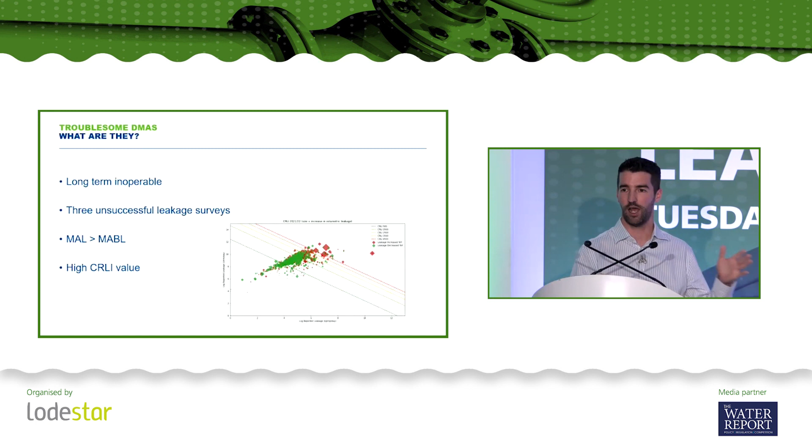So if the calculations aren't working, you don't know what the leakage is in there. In a lot of areas, we find that can sometimes give you a high level of leakage. When it's operable, it gives you a high volume of leakage, but then the next week it's inoperable again, and that high level of leakage is carried forward. So that can give us an issue when you find quite a few of these inoperable high leakage areas in the reported figures. So trying to get those operable, understand what's happening is really important.

Previously, it was almost like we would do the stop tap bashing. We talked about the listening sticks this morning. That would be our standard approach. So we'll be going around. If we couldn't get that leakage down after 3 surveys, you'd have thought you'd learned by then that it's not working, you need to do something different.

So we have some lead leakage technicians that are the best of the best within our company. They're given a little bit more time. They're not targeted in the same way. So they're really trying to do a deep dive within the DMA to understand what's happening, why can't we find it? And they're very good at finding it when it's leakage. But we still have the issue, if it's not leakage, you're never going to find it.

So we're moving on to the approach where MAL, the minimum achieved level, never gets down to where it should be. So you can do estimates on the number of properties, the length of mains, that kind of thing, looking at where we think this should be. And no matter how hard we try, we're never getting below a certain point. And it's trying to understand, well, why is that? Is it really difficult to find leakage, or is it not leakage? So we're prioritizing them to look at them in a different way.

The final one I've got on there is some work we've been doing with Invenio earlier this year, and they made us aware of this CRLI value, we call it. Don't ask me what it stands for, but it's a bit like a leakage indicator, which is a product of leakage per property and leakage per length of main. So it's looking at, for that size of DMA, what is your expected level of leakage?

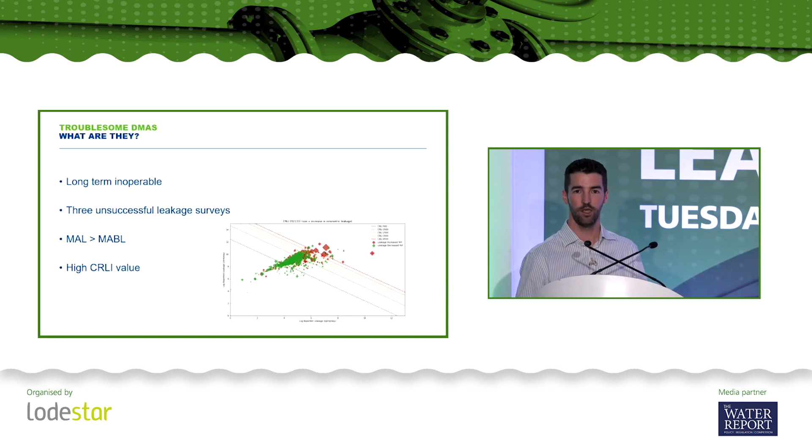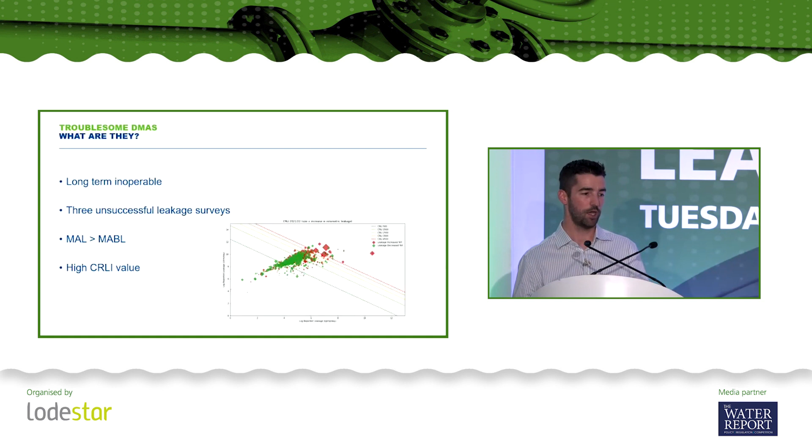And you have these values where the average range or a good range would be about 1,000. And then you're looking at your outliers and you're trying to take them from the outside of the graph and bring them down. So again, it's just a different way of looking at the data for the size of that DMA. Something doesn't look right here, and you're trying to prove what that is and reduce the leakage.

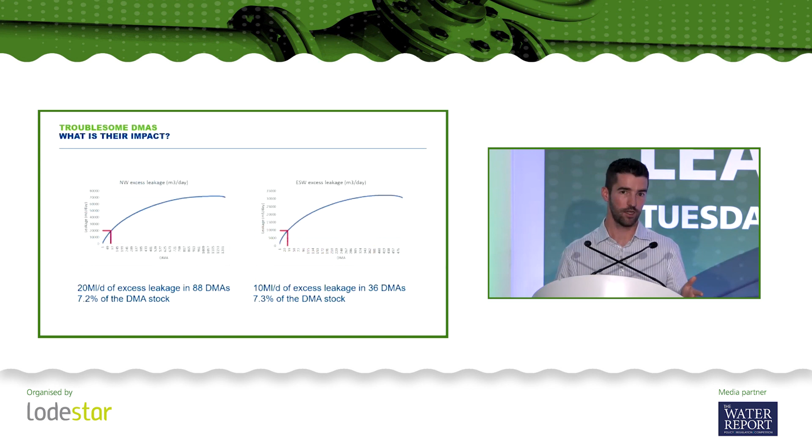So we did some analysis to try and understand how much of an impact these DMAs are having on our reported figures. So if we look at the targets that we were hoping to achieve in this AMP, around 20 meg reduction in the north, just using approximate figures, that leakage is within 88 DMAs, so 7.2% of the DMA stock. So if we can improve that 7.2%, then that would achieve our leakage target

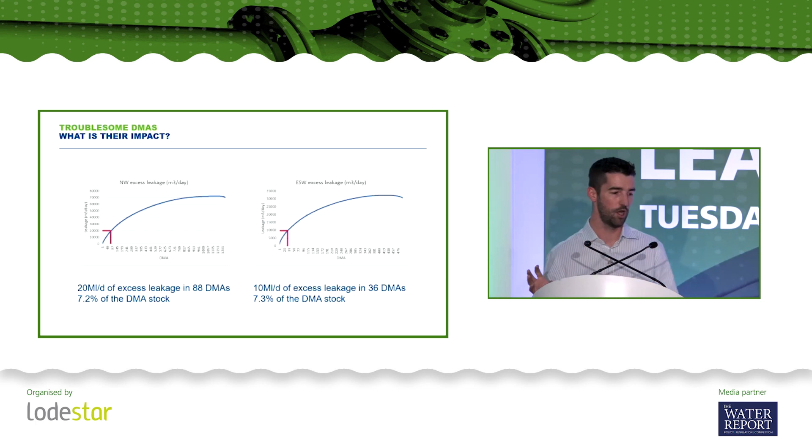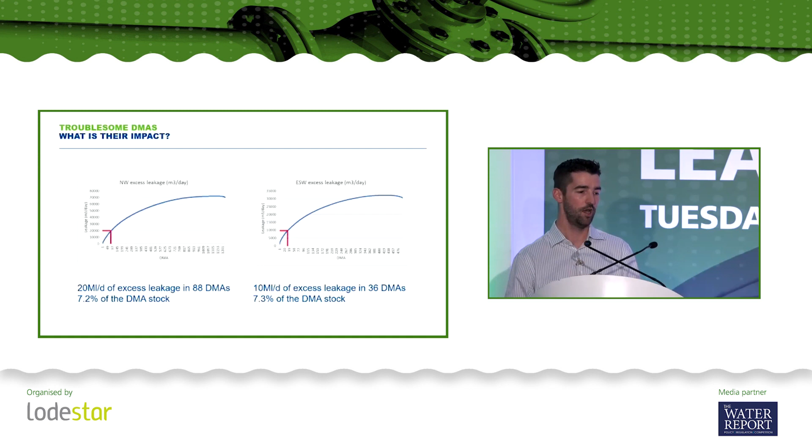in this AMP. And very similar for Essex, so like I say, completely different region, different background. But if you look at the 10 meg reduction that we were looking to make this AMP, it's in 36 DMAs, almost exactly the same percentage, so 7.3%. So it's really about if we can focus into these DMAs and get these sorted, it's going to have obviously a significant impact on our performance.

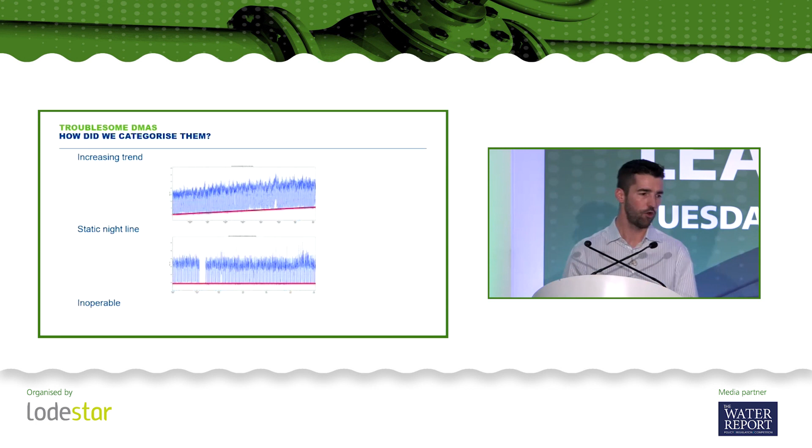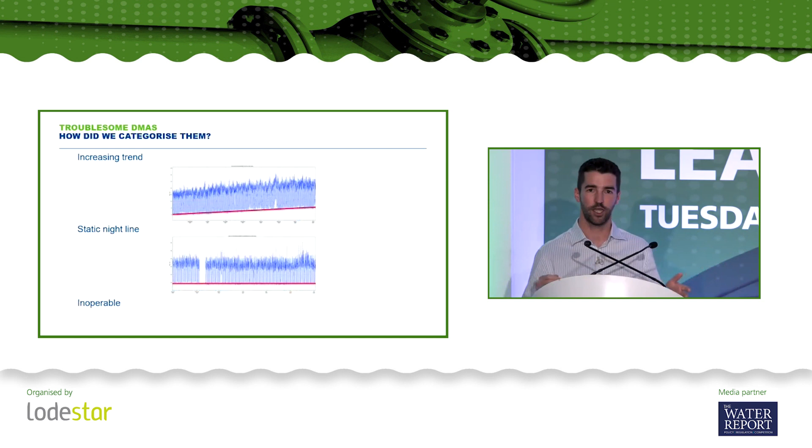The final thing we did was categorizing them, so you get different flow categories. So the one where we've got an increasing trend looks more like leakage. Something's changed, it's deteriorating, so you suspect that is leakage breaking out. And then on the other side, you've got these static night lines. So no matter how many times you get in there, you just can't get below that point, and it just has that flat night line.

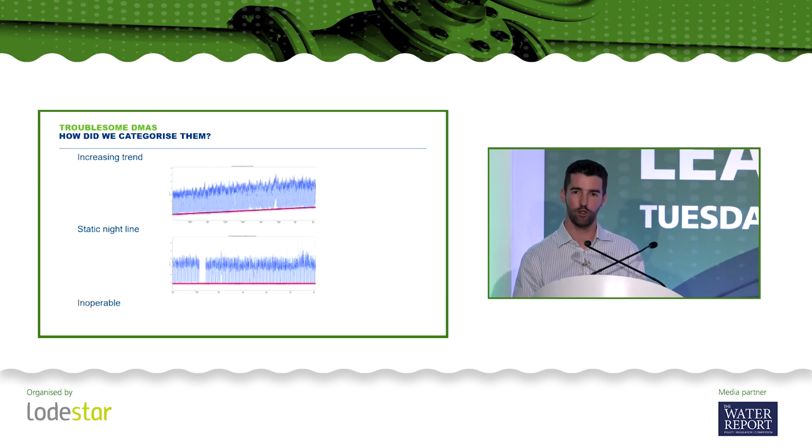So we try to treat those slightly differently, and we've applied different approaches, and I'll go through some of those in a minute. I've got the inoperable in there at the bottom, which needs to be sorted, needs to be operable again, but they never really get involved in these projects because you can't really send a contractor in to sort leakage out when we don't really know what's going on. So it's just a flag that those inoperable ones are really important to get sorted out, but they're taken out of the scope of the project.

So I'm just going to run through a couple of the projects that we've done. So the first one's FIDO Direct. Very quickly what it is: it's a lift and shift survey with the FIDO bugs. So FIDO come in, they will do a sweep of the DMA, they'll do all the follow-ups on the POIs, and they will do a blue line mark on the ground and then pass all the information on to Northumbrian Water to then do the repairs. So we did about 15 DMAs between April and July this year.

And these are the initial results. So in the 10 DMAs that we did in the north, from about 120 POIs, we ended up with 71 leaks. And in terms of nightline reduction, we achieved a 1.5 meg reduction in leakage over that period, which was really good. In Essex, we did around 5 DMAs, a huge amount of POIs there, 228, but only resulting in 39 leaks. But again, the actual leakage reduction was very promising. So 2.5 megs in that 3-month period was really good and comparable with what we were doing with our own technicians.

So this is all additional resource on what we're doing. So I suppose we're trying to use our existing ALC technicians to maintain that natural rate of rise, and this stuff is then making the step change to get us down on the target. I would highlight that we don't have any noise logging capability within Northumbrian Water, so we don't have a noise logging team ourselves. We don't have any permanent fixed acoustic network or anything like that. So for us, this fills a bit of a gap.

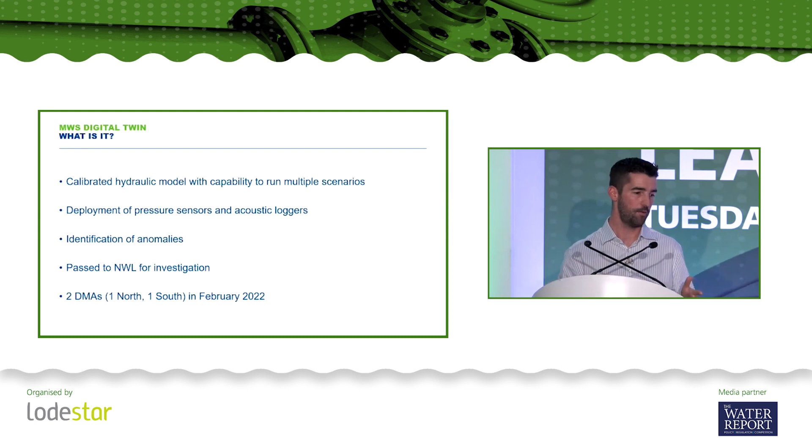Moving on to the Morrison Water Digital Twin. This was more focused on those static night lines. I should have said the FIDO was where we knew there was an increase in trend, so we suspected leakage. These ones now we're looking at where we had a flat night line. I might not be doing a great service here, but my simplistic view of it was...

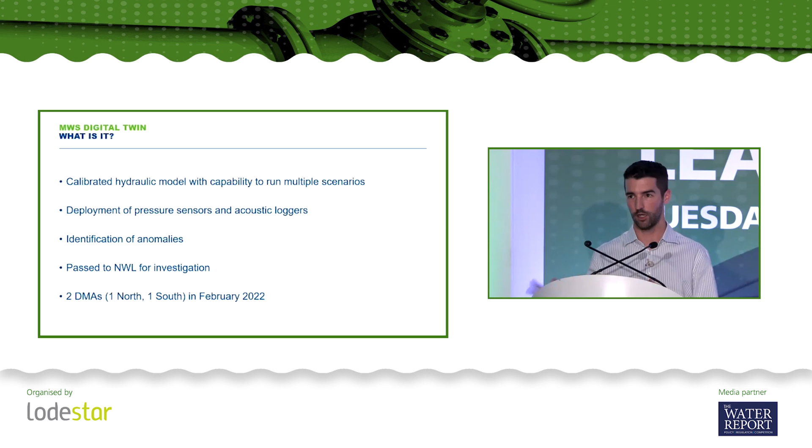It's a calibrated hydraulic model with the capability to run multiple scenarios. We provide all the data in terms of GIS data, demand data, and then they deployed some pressure sensors and acoustic loggers within that network as well. They're looking for anomalies. So the model says there should be this amount of flow in that part of the area, and you identify where it's different. If there's an issue, you go in and look at what's causing that difference - is it because there's more leakage than we've got in the model? Is it because there's more demand? Is there something going on in the network?

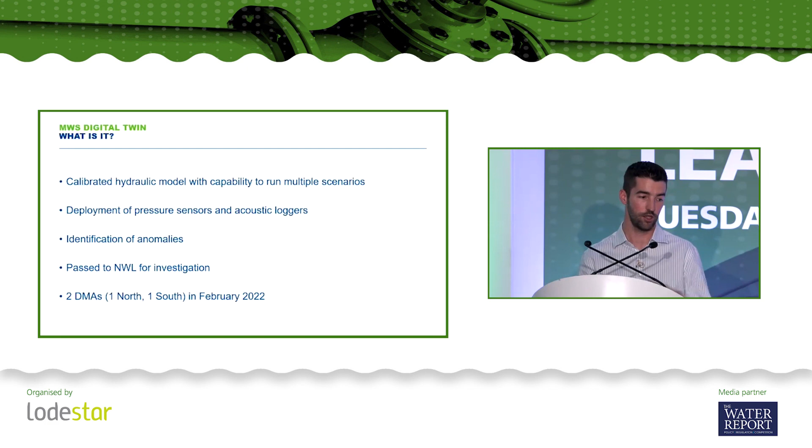We only did 2 DMAs early in the year, about February time. We did one in the north, one in the south.

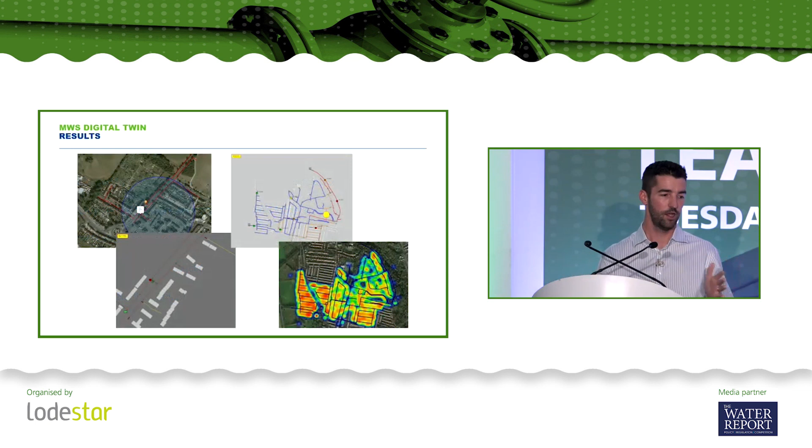Some of the initial results - I'm not sure how well you'll be able to pick up the graphics on screen, but on the left was one of the DMAs we looked at in the Essex region. That highlighted a point of interest at the bottom of the DMA. When we investigated further, we found there was a broken boundary valve feeding into a dummy area, so that additional demand was just feeding a different system altogether. We got that booked in for repair, replaced it, got it closed, and that dropped the night line by about 3 litres a second.

That was a great result. We also picked up a couple of small leaks on the acoustic loggers, and we got that DMA back down to the historical level. Really good benefit from that one.

Slightly different story in the north. This is a particular student area where we've had a high level of leakage for a number of years. We've had the leakage technicians in there, couldn't find anything specifically leakage-related.

So there was a couple of really interesting points. Looking at the model in this detail, it highlighted a couple of properties where we didn't have any of that demand data in NetBase. There was a swimming baths, which was linked to the next DMA, and I think there was something else - a tennis court or sports centre - that we just didn't have on the system at all.

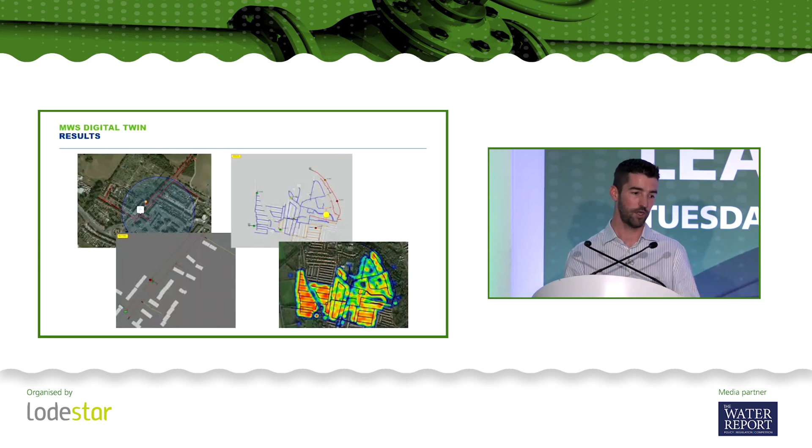It really gets you into that level of detail where you're picking up on stuff in that day-to-day churn of prioritisation where you're relying on the system to tell you where leakage is. If you actually delve into the detail and understand exactly what's happening, there's some really useful insights in there.

They had some really nice mapping, a heat map of the demand data, and they found that when they modelled it, the water was taking 24 hours to get from one side of the DMA to the other, which was quite amazing. That was news to us because it's quite a small DMA - I wouldn't say it was particularly large - and the fact it was going on such a convoluted route around the DMA to get to the far end.

It was actually taking a day to get to the far side of the network, and one of the pipes in the middle was critical - if that failed, then we would lose that other half of the DMA.

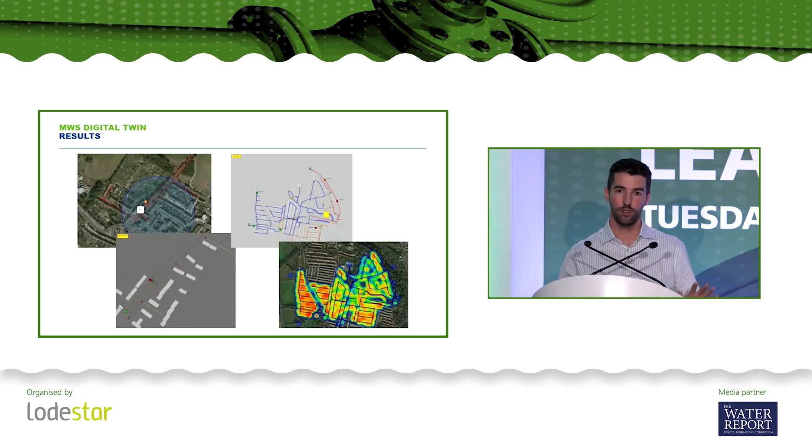So it's highlighted a couple of things we need to look at, either for having some more monitoring on there or making sure we follow that up. In terms of leakage, I think we proved there wasn't any significant leakage here. Obviously the reported figures were saying there was a lot of leakage, but we couldn't find anything significant with the acoustics or with those changes in the demand data.

What we've come to believe is we've done a virtual step test within the model now, and we've isolated a small section of the network, which I think is this particular student area. So what we think now is because a lot of those properties are rented and the students probably don't have any kind of responsibility, they're in and out of those properties fairly quickly, and the landlords probably aren't too bothered because the bills are getting paid.

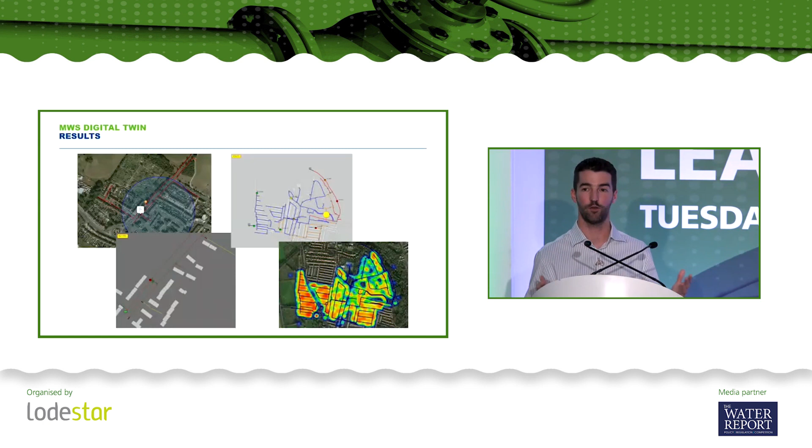We suspect there's either a higher demand there or there's plumbing losses within the properties. So the next stage is we want to try and evidence that and feed that back into the calculations, because until we do that, we don't get a drop in leakage. So we really want to do some more work there to prove that point, but we're convinced it's not leakage in this area now.

That leads nicely on to the final one, which is the Invenio stopwatch, which a lot of people have used now, been involved in the club projects with the development of the stopwatch device. So we do a full stopwatch survey of the DMA. Every property gets one of the Invenio loggers on, and it's about calculating the demand. It's a bit of a stopgap until smart meter rollout gets to the point where we can understand the consumption at all the properties within that DMA.

And that includes any continuous flow, so any leakage on those properties gets identified at the same time. Then all those data points are aggregated together. You compare that demand profile with your DMA flows, and you can get some insights from that, whether it looks like it's on the customer side demand, or customer side leakage, or on the network, or if there's any other issues. So it's quite powerful to get into that much detail.

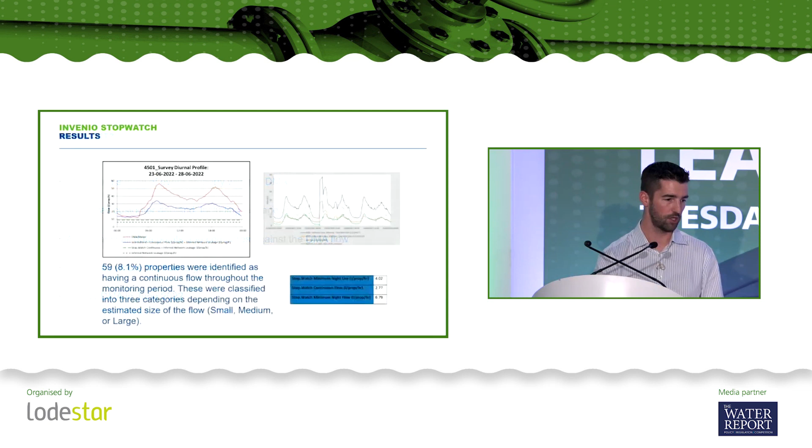And we did one DMA earlier this year in Essex as an initial proof of concept on this. For the graph on the left-hand side, that was the difference between - I think the blue line is the Invenio flow data and the red line is our DMA flow.

What we found was there was a step difference - it clearly showed we were accounting for more flow going into that area than was actually going into the properties. I think we did some further investigations and identified the outlet flow meter had a possible scaling issue. And you know, it's that kind of thing - when you just stop and look at it, it's so obvious, you wonder why you're shooting yourself in the foot.

There's an example on the right of when we had a burst recently in that area, and the scale of the increase on the inlet flow meter is different to the outlet flow meter. So we need to do some more work on that, understand where the error is and get that resolved. That's obviously going to have a big impact if we can resolve that issue.

The other thing they picked up on was 59 properties, about 8% of the properties in that DMA, had a continuous flow. So these have been passed on to our customer leakage team to tackle that customer side leakage. I don't know if you can quite read the table in the bottom right hand corner, but it breaks that down into what was customer usage, what was this continuous flow, and what's the network leakage.

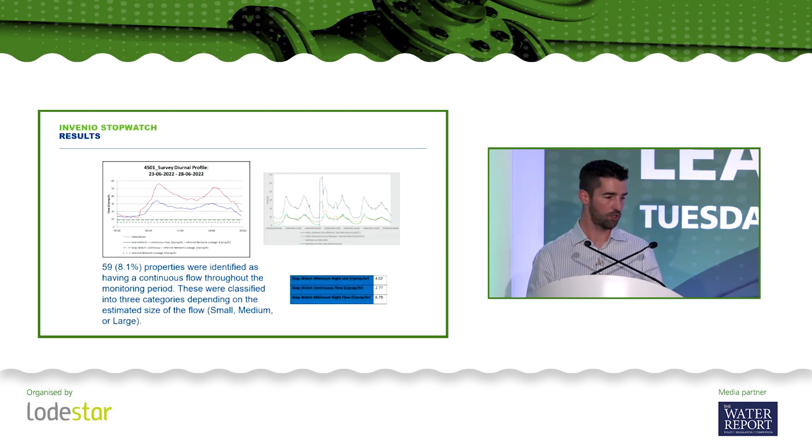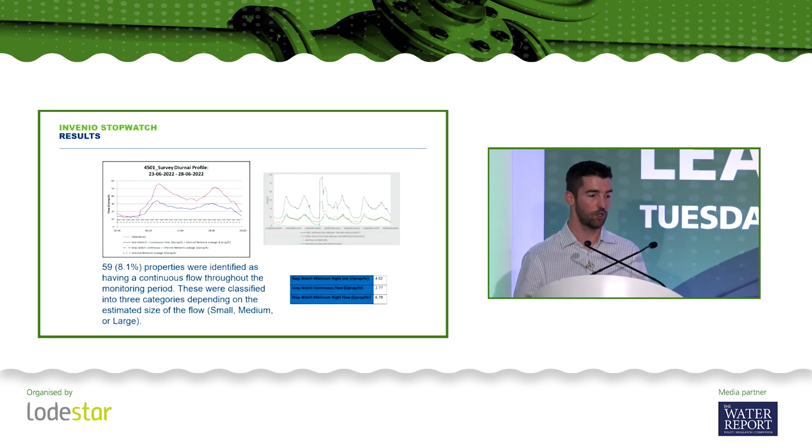So the profile they've got there is a higher estimate than what we're currently applying from our average models. Again, it's - you work out a company value and apply that as best you can to the DMAs based on property type. But when you get into the detail of it, there's a likelihood that customers are using a different amount of water than what we're actually applying in our models. So that was really good insight, and we just need to make sure we feed that back through the calculations and get that off the reported figures now.

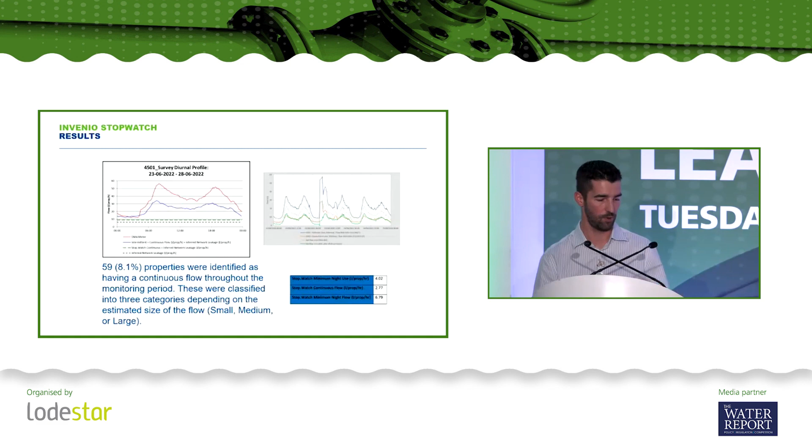Some really good stuff. This is where we want to link up with what I was saying before on the digital twin. That digital twin approach has highlighted an area where we suspect a smaller section of the DMA is causing the issue. We're now looking to put the stopwatch devices just on that section so we can prove that. Once we get that evidence, it enables us to put it in the calculations and feed it all the way through. So it's starting to link some of these projects together, how they can complement each other.

Final conclusions: I think everything's been successful to date, it's been proof of concept, and now it's about how we take that forward.

We've got another 10 FIDO surveys that we're going to be progressing in the north. I think they're due to start in the next couple of weeks, so we're hoping to get a similar result. Another couple of megs would be great from that work. We have raised an order for 14 digital twins, so we're going to do 10 more in the north and 4 in the south. Some of that's part funded through the innovation team, so that's good, and any extra we can contribute towards the leakage challenge.

We're hoping, with that original DMA, to do the follow-up with the stopwatch devices in that area to see if we can bottom that one out and really get the benefit from that. On a side note, we're bringing in some Invenio technicians to help us with those curly DMAs, where they've identified an outlier. We're looking to hand those DMAs over as a bit of a 'you go in and own them and come back to get us back to the area they should be for that size of DMA.' So it's almost handing those over to the contractor to deliver the leakage reductions.

I think I've run through that very fast. I don't know if I'm ahead of time or not, but if right, that's great. Thank you, thank you very much.

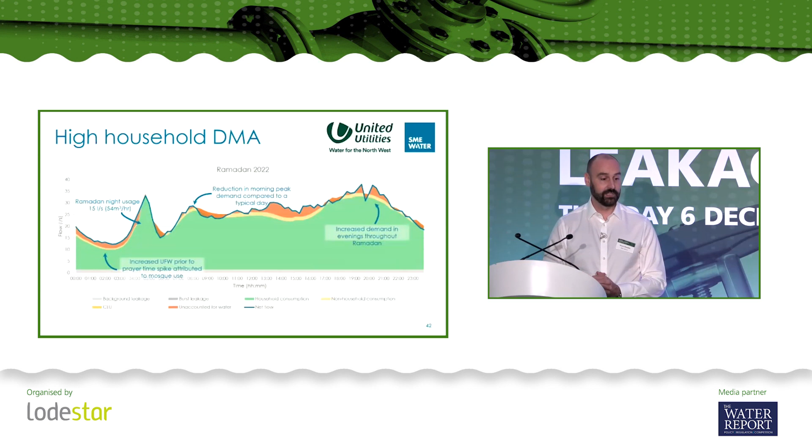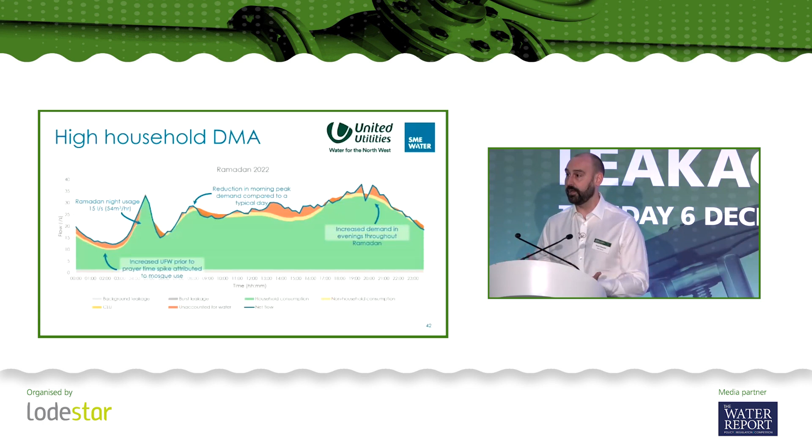Now the real test is how does it stand up? We run that same process throughout the whole year. In this case, we put that DMA through Ramadan 2022. It's a very high Muslim population DMA, significantly affected by Ramadan, with very high occupancy, so it's not well represented within the household night use model because it's got particularly large usage—we were seeing around 600 litres per property, very high values. But when we run it through our model that predicts how that DMA should change during Ramadan, you can see it almost perfectly fits. It's a really good fit.

That gives you confidence that actually there isn't leakage there—there's something else going on. Maybe we need to improve what we're doing from our reported leakage perspective, maybe look at targeting those households, maybe look at water efficiency, since we've got a large population in there.

So what does that mean in terms of what Paradigm's then delivering? First, it's looking at DMA integrity issues. This will very clearly tell us some of the easy wins—does that DMA match what's going into it? Is it breached? Is there an obvious meter scaling issue? It also allows us to identify that unaccounted for demand.

Have we got clearly non-household usage in there? Should we be doing something other than leakage? Because at the moment those problems sit within our reported leakage. Should we not be putting solutions in there, for example pressure management to target leakage, when actually it's not going to react because it's a demand issue rather than a leakage problem?

And looking at leakage reporting issues—we've identified in that example a large proportion of household night use. Is our household night use model fit for purpose? Rather than spending lots of money on leak detection in that DMA, should we be going and putting some extra cul-de-sacs onto our monitor, making sure it's representative?

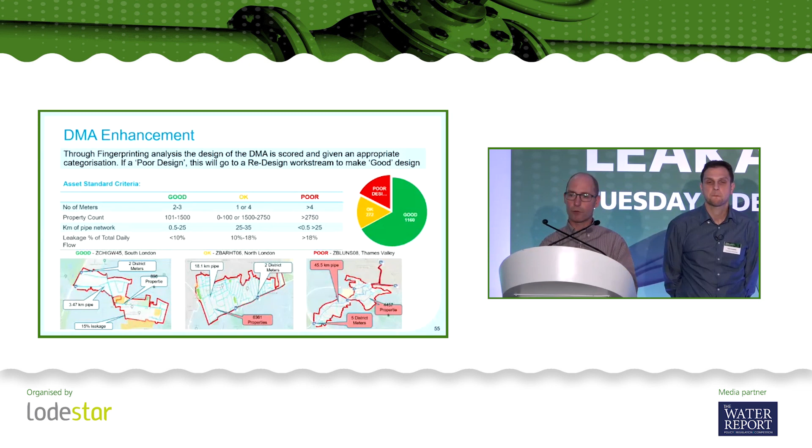And we identified 301 poor DMAs within the whole suite of DMAs at Thames, and we've allocated 76 of those to a redesign program that's part of the SAMP. That will give us a scoring aligned with industry practice designs and distribution mains and feeds, and the opportunity to maintain hydraulic flow and contingency planning by having good designs in the first place.

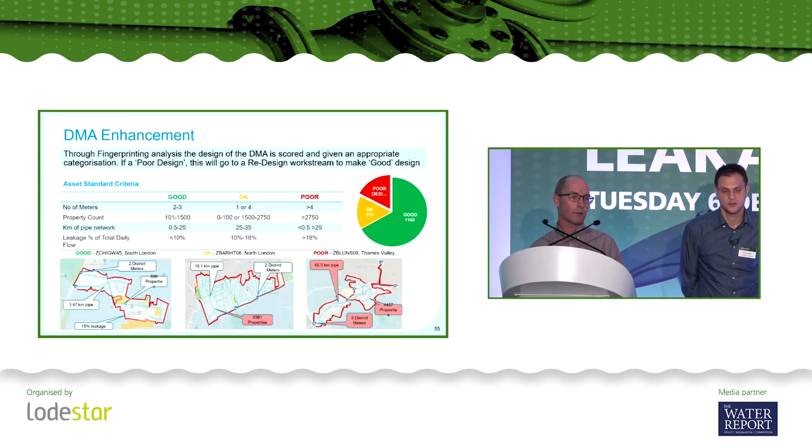Moving on to the DMA improvement element, we've got a simplified view on this process because it is reasonably complex. We look at prioritising problematic DMAs through a fingerprinting process where we analyse the data and look at operability and other measures.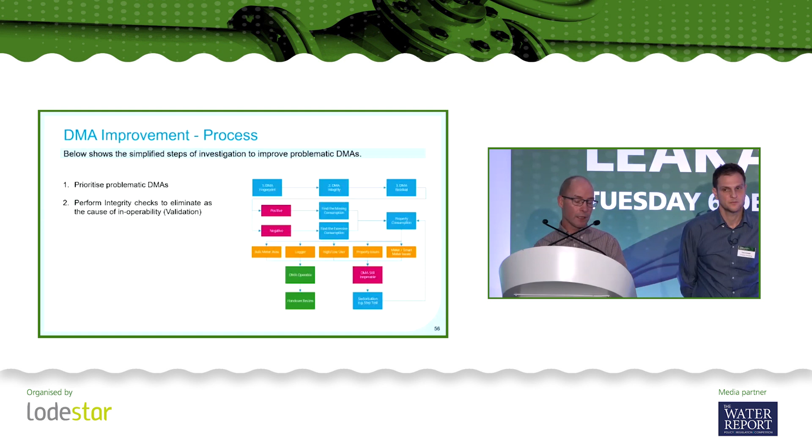We perform integrity checks to eliminate any cause of an inoperable measure within the DMA. That's doing validation and asset health checks, checking all the meters, checking all the flows, checking the boundary valves, and validating and correcting those as we go through.

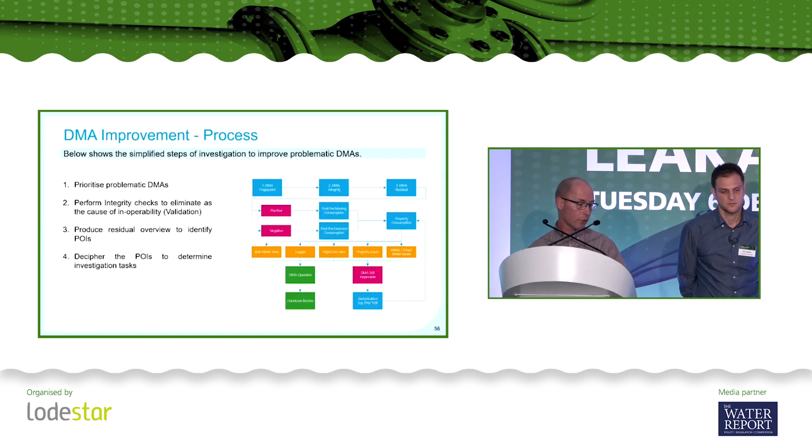Then we start producing the residual overview to identify points of interest related to consumption and inoperable measures related to that. So we decipher those points of interest to determine investigation points, which are across the orange sections there in the flow diagram.

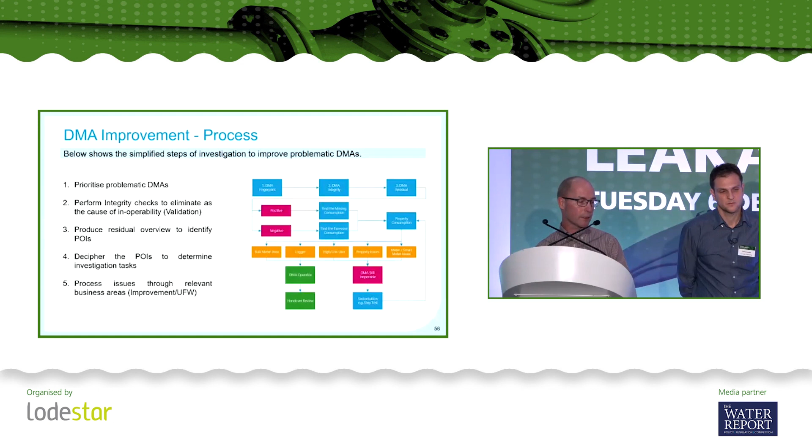And then we look at those, and if we can't resolve them, we drill down a bit deeper into the process. In terms of the issues, we look at the business areas to improve the unaccounted for water in that section.

Just to illustrate, within Thames we have complex investigations. It takes 39 different tasks involving 17 business areas to look at the problems we've identified in terms of operability and the consumption component. We work diligently to try and resolve those with a small team looking at the specific DMAs we've identified for the fingerprinting process.

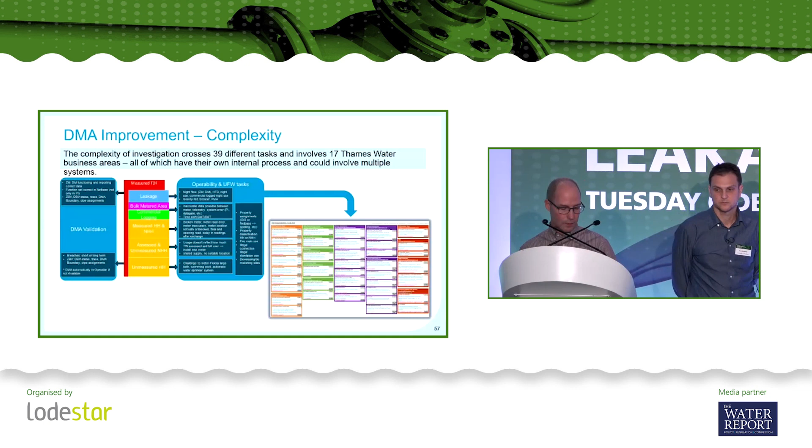So I'm not going to take you through the full fingerprinting process because that would take a bit longer, but we've just covered the bottom-up approach in terms of fingerprinting, validation, and the improvement element. Next we're looking at the leakage programs that we use to resolve some of the leakage we've got after improving this data set.

And that's the reactive kind of activity, the recovery and the reduction. What Tom's going to take you through now is the Lot 4 programs for specific targeted DMAs for leakage reduction. Before he does that, I'll just take you through the way we target for the Lot 4 programs, which is by establishing a DMA entry point.

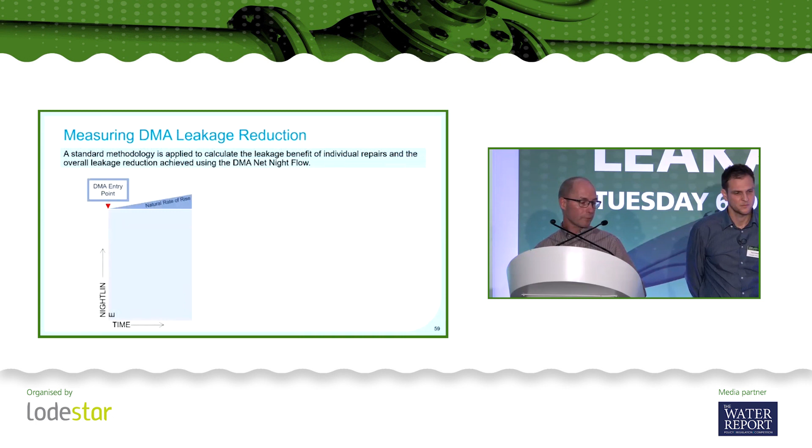So we look at the night line, we agree on the night line. There's some analysis done in determining the night line through our governance processes. In terms of the performance we expect from the Lot 4 programs, it's a reduction performance. So the entry point is set, and we expect some natural rate of rise and some recurrence within that DMA. It's up to the incumbent service partners to manage that.

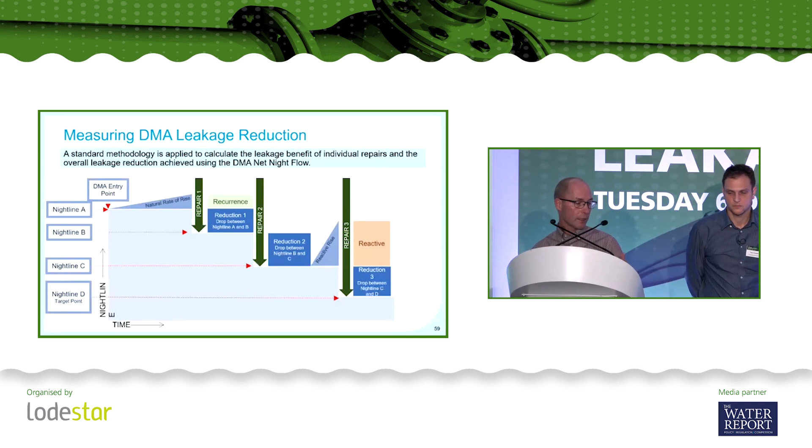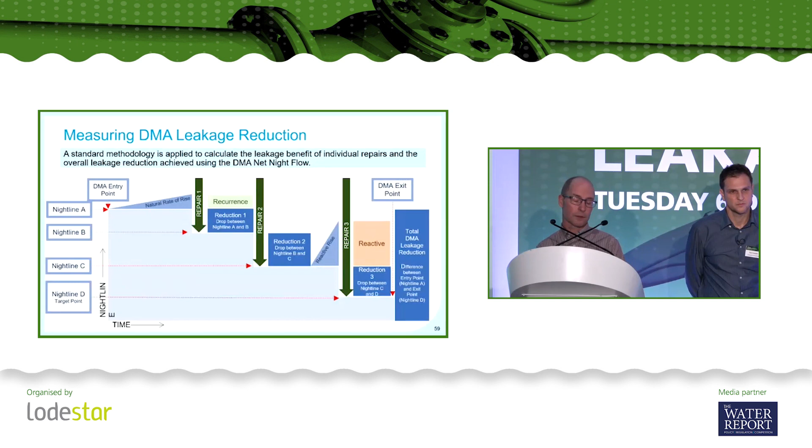Their task is to reduce the leakage, reduce the night line through specific, high quality repairs. Then we'll performance manage them in those reduction activities. As I say, Tom will take you through details on how he's performed in the field to deliver that. At the end of the journey, however many leaks are found, the exit point determines how we performance manage and pay for those services. So over to Tom.

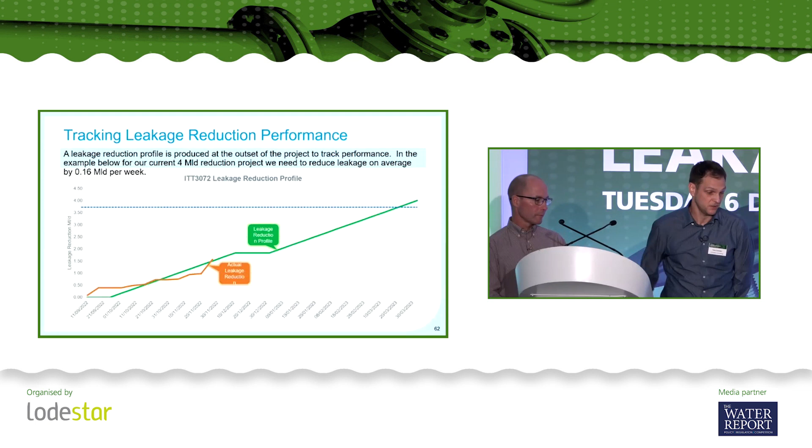So in the example below, we're aiming to achieve 4 megalitres of leakage reduction, and that's an average of 0.16 megalitres per week. So you can see the green line is our leakage reduction profile, and then the orange is our current performance for our current project at the moment. So we're delivering a leakage reduction against a set target. We're not aiming to hit a target number of leaks.

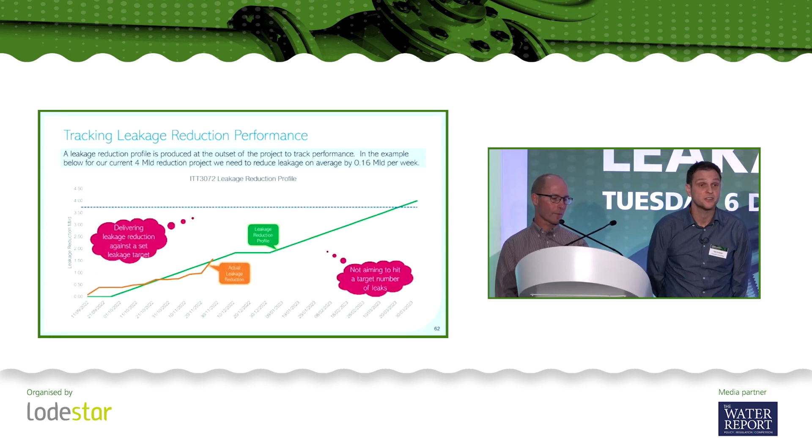It's about reducing leakage. In terms of achieving DMA leakage reductions, a proactive repair strategy needs to be put in place to prioritise leaks found and fix them quickly to achieve effective leakage reductions in difficult DMAs. So this has really been the hardest battle, and to be fair to Thames, they're really starting to get onto this now. But this is an ideal situation.

So this is a real DMA. So you start with your entry point, repair a leak, get a nice saving, repair another leak, get a nice saving. The leakage goes up a bit, but then you get another leak, then you get out. That's what it used to be.

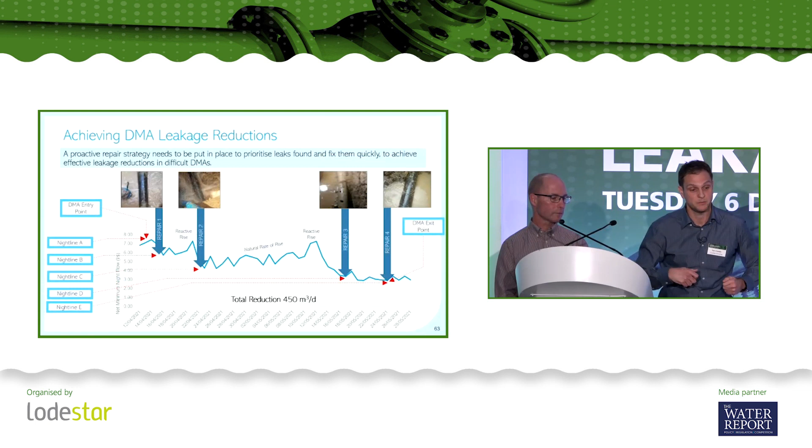But what we've moved to now is more that we hold on to the DMAs for a longer period of time. So to both reduce the leakage and then manage it at that level. So it doesn't just happen that we give it back and then it goes up. And the thing to note is that when you're doing these leakage reduction projects, not all leaks will reduce leakage. So they don't all contribute towards leakage reduction.

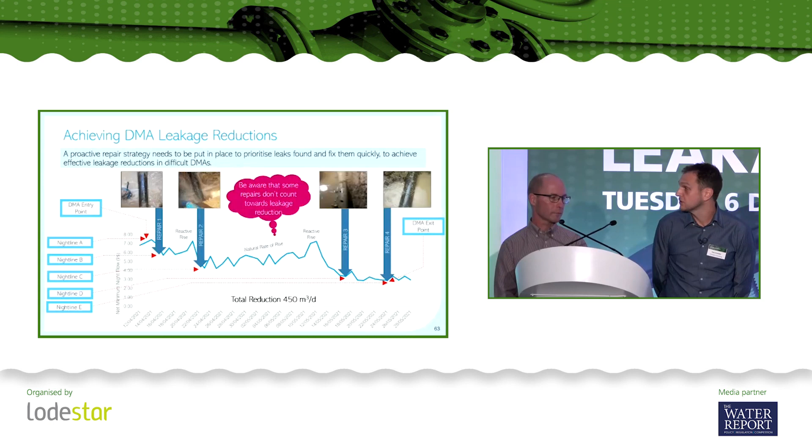We apply a smart investigation process for resolving difficult DMAs. So this is really just applying a structured approach to the leak detection. So we do the leakage analysis, we try and split the DMA up as much as possible. We manage the detection teams very closely, and then we predominantly use different types of noise loggers on the network, and then we schedule the follow-ups, and then we just repeat the process until we achieve the reduction that we're aiming for. And the thing to note really is it's a technology-driven approach. That's what we try and apply, is using the technology in the right way.

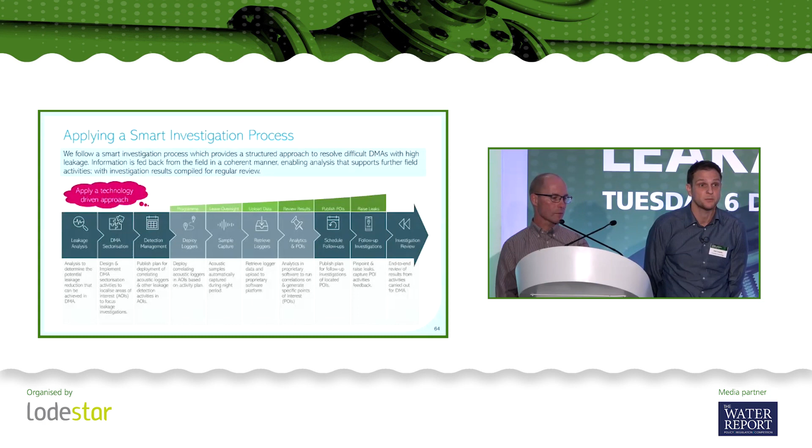As I mentioned, we try and split DMAs up as much as possible because we find that investigating confirmed volumes of leakage in smaller areas really motivates the team. If they know there's this much leakage in this area, they'll usually find it. Whereas if it's a big area and you say, yeah, it's got this much, then it's much harder for them.

So we use various techniques to split up a DMA, but the moral of it is that we make the most of existing metering, and it's not just step testing. It's doing different things on the network to sectorize it and work out what the leakage is.

All of our leakage detection activities are planned and tracked in NetOps, which is our web-based application built on top of NetBase, provisioned on a cloud platform. And we basically use NetOps to publish all the leakage activities to the field operatives and get their live feedback. So we basically plan, publish, get the feedback, and then we track the results.

So no more out-of-date paper plans. We don't have any paper plans. And then all the key information is at their fingertips when they're doing a job, and also at our fingertips so we can manage and monitor the work.

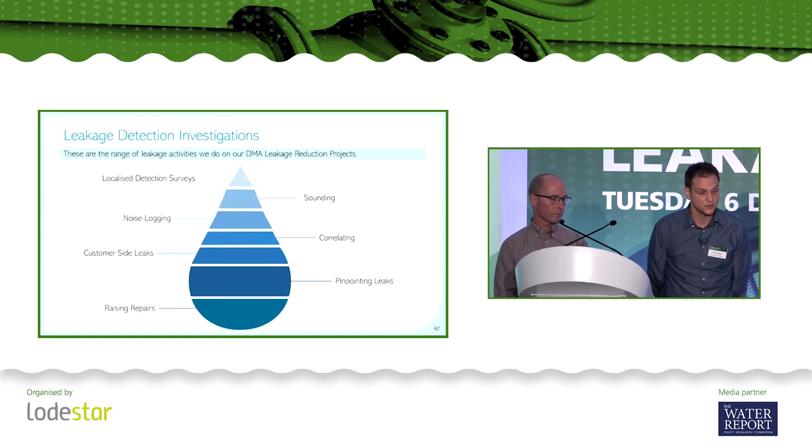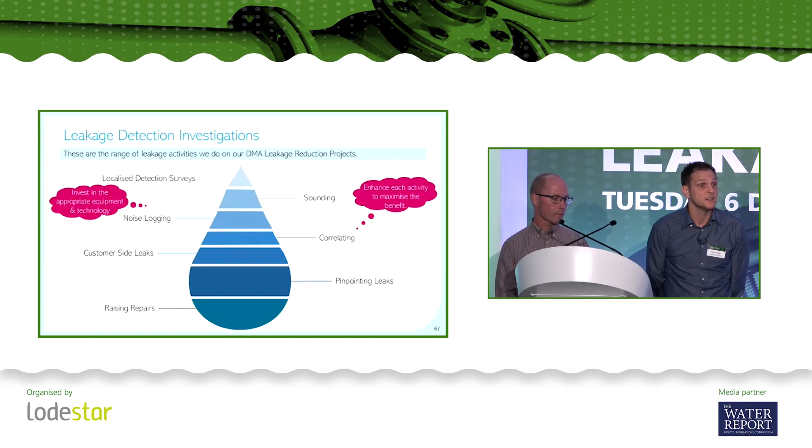There's a range of leakage activities that we do. It's nothing groundbreaking, so it's all the usual types of activities: sounding, noise logging, correlating, investigating customer-side leaks, pinpointing leaks, and then raising repairs. But what we try to do is invest in the appropriate equipment and technology, and then enhance each activity to maximize the benefit. So just some examples of how we enhance each activity.

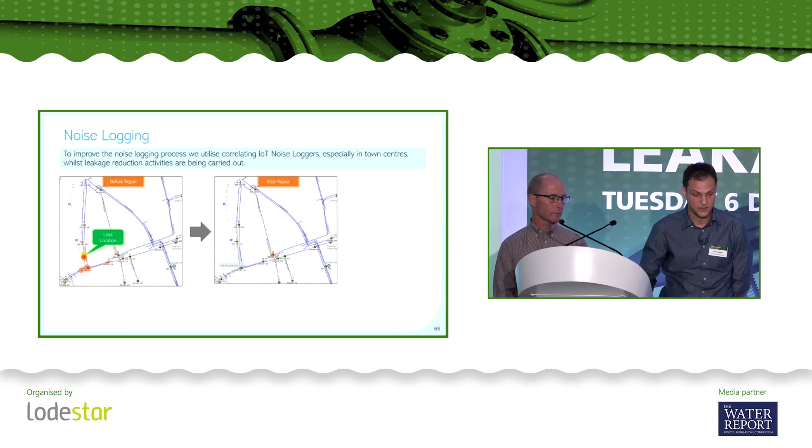So in terms of noise logging, to improve this process, we use IoT noise loggers, and this is especially in town centres. So we'll leave them in our DMAs while they're under our control. And what it gives us is visibility of the leaks. And then once they're repaired, we can make sure that it has been repaired and another leak hasn't broken out. So you can see there's the reduction from that leak when it was repaired.

We also use an AMR meter when we're investigating customer-side leaks. So this will register flows at 1 minute intervals, and we can install them on boundary boxes, and we can also replace the existing meter for a night. And that just gives us certainty about, yeah, it is a leak, and we can quantify it. So it just gives you an idea of that.

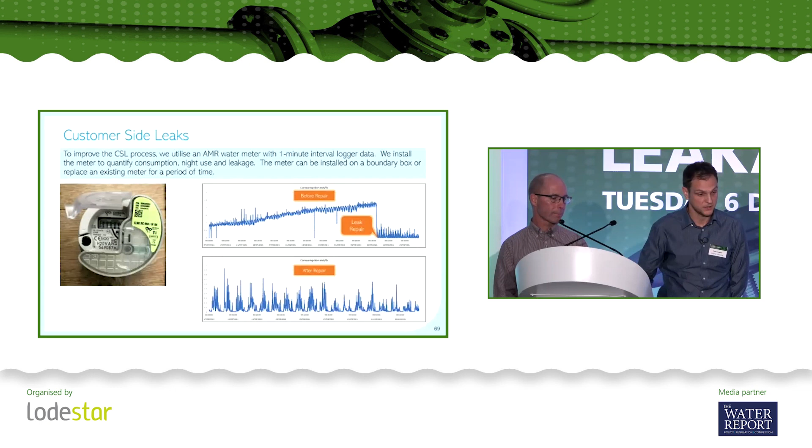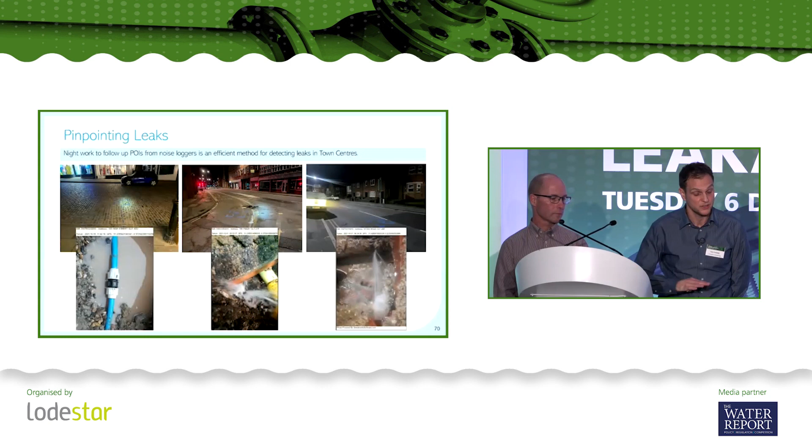And then, sounds obvious as well, but we do strategically plan the work to do some of the work at night, because it's just much more effective in town centres; it's quieter, and they can usually find quite a lot of leaks in one night. And then finally, we use a high spec correlator on long sections of main with larger diameters, just to pinpoint leaks there. And we also use hydrophones as well, where we need to.

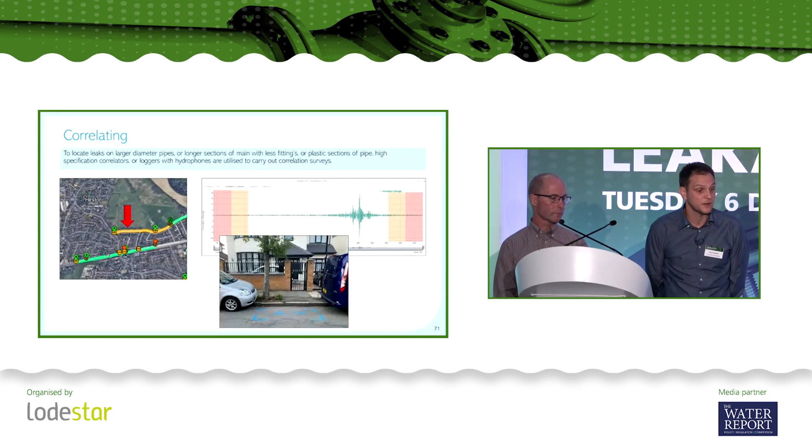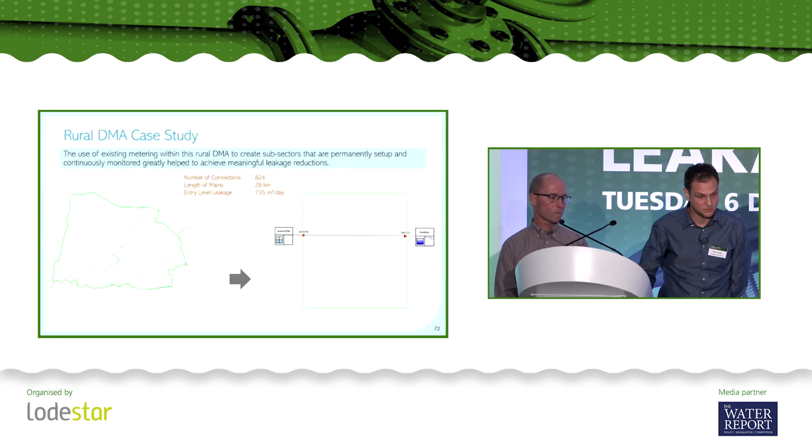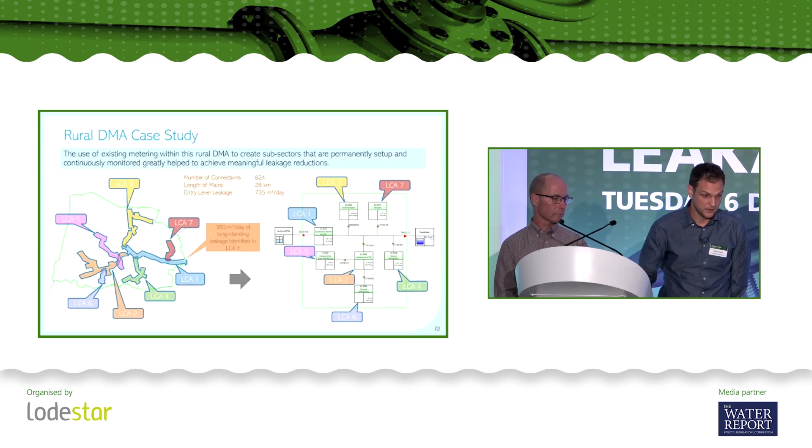So just to give you a very brief case study. So this is a rural DMA, and in this DMA, we used existing metering to split it up, and we defined all of the areas, and in Thames they call them leakage control areas, and you might call them waste areas. And these are permanently set up, and then we identified that there was 350 meters cubed a day on this long section here. So then we investigated it, and it's on effectively a trunk main, but it's within the DMA, a 7-inch main that goes from a treatment works to a storage reservoir.

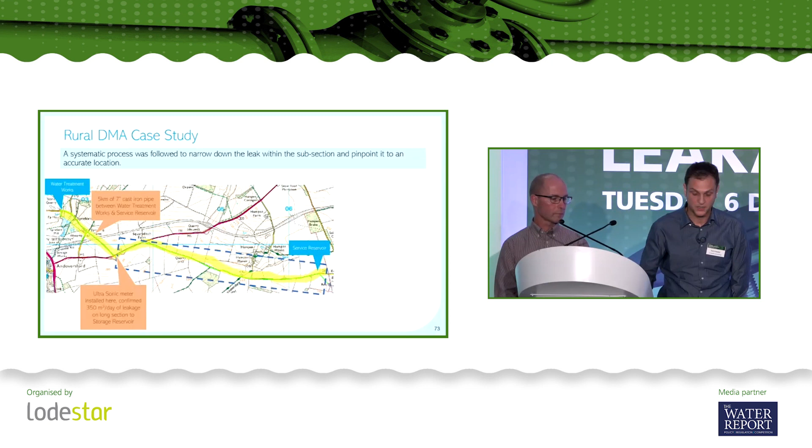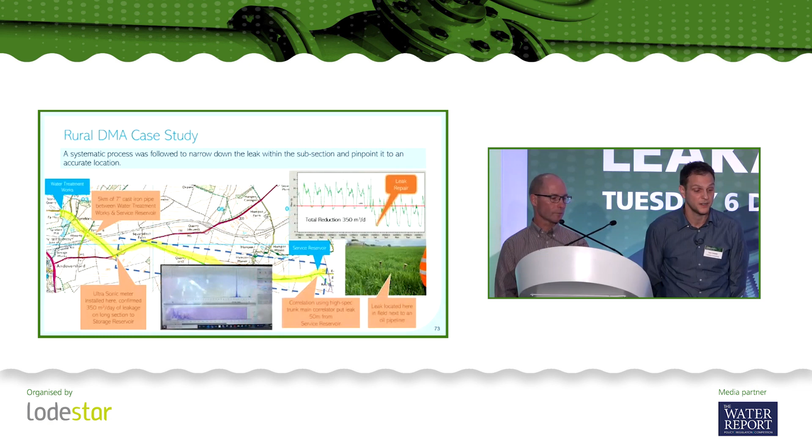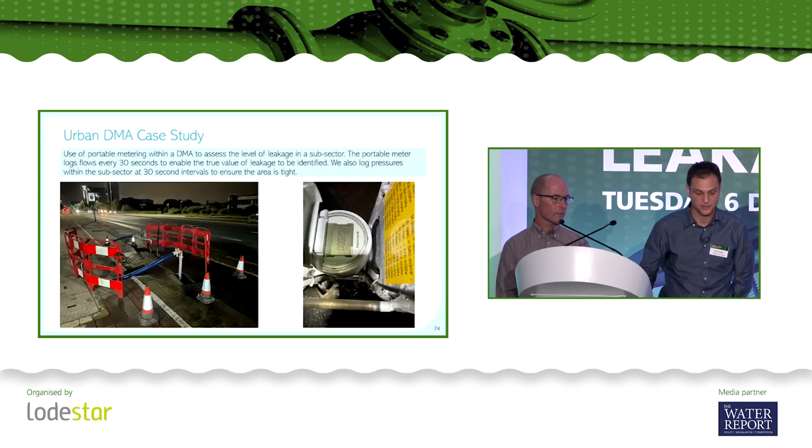And then finally, just an urban case study in North London. This is where we used a portable meter within a DMA to assess the level of leakage in a subsector. It logs flows every 30 seconds, enables you to assess the true value of leakage, and then we also log pressures at the same time at 30-second intervals. So you can see the setup there during the night.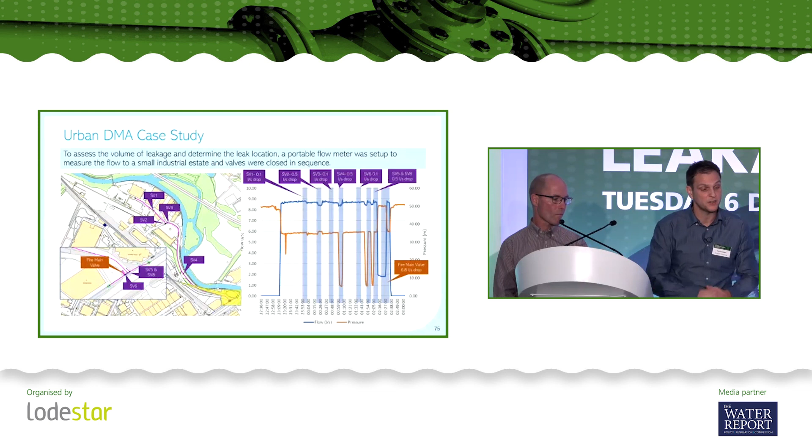We were investigating a small industrial estate in North London to determine the leak location, and this just really shows what it looked like. So we closed the valves in sequence, and we didn't really get any drop, and then we closed a valve which was on a fire main that the normal detection services didn't really know about. When we closed that, we got a 7 litre per second drop, and in fact it was worth a lot more than that once repaired.

So really, just to summarize, successful DMA leakage reduction projects require an end-to-end management approach to sustainably reduce leakage and maintain lower leakage levels. So it's carefully selecting the areas, doing analysis and subdivision, having permanent monitoring, getting good feedback on the work, and having a structured process that you follow. And then I think most importantly, building the skills of your team, so they're multi-skilled and they're able to use the latest technology in the right way. That's it.

Well done, gents. So, any questions from the audience around those? I'll ask a question if there isn't.

Just in terms of Thames, have you got dedicated leakage teams that follow up on these areas and drive the performance in terms of the actual ultimate repairs? In terms of repairs, following round. So we've got regional delivered repair activities going on in the restructure now. So it's all regional delivered, and some of these high priority programs like this, where they do a lot of quantification to identify what the leakage is, they're prioritising, and there's a dedicated R&M gang that follow them around.